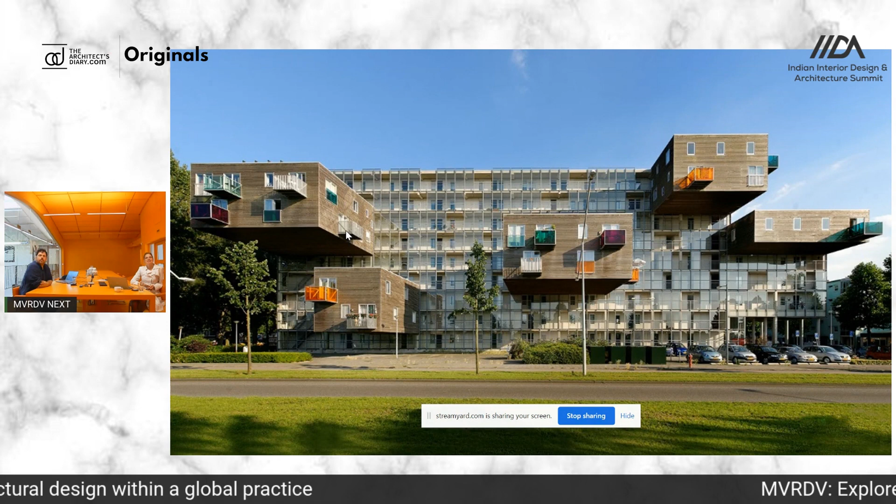Let's look at social first. This is the WoZoCo in Amsterdam, one of the first built projects by MVRDV, and for me personally one of the first projects I fell in love with as an architecture student in the 90s. We were given a site and a brief to fit 100 housing units for the elderly into a very compact plot. The amount of square meters and units we were asked to realize could not fit within this plot, so we questioned the regulations.

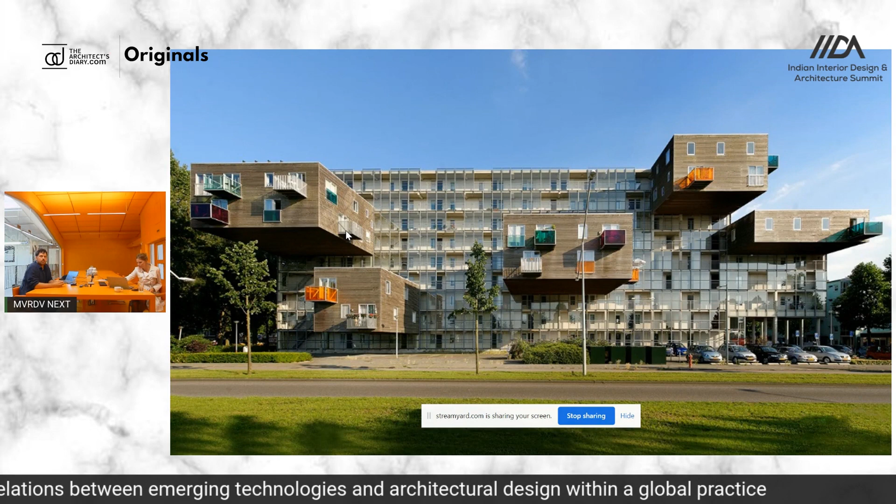At that point, it was possible in Amsterdam to actually exceed outside of the plot boundary. So by adding extra units and cantilevering, floating over the original plot boundary, we were able to realize many more units and give everyone in the block a happy and social place to live in. Even though it's housing for the elderly, if you look at them on their balcony, it's pretty rock and roll. Through this one intervention of extending outside the plot, we made units for everyone more spacious and more pleasant.

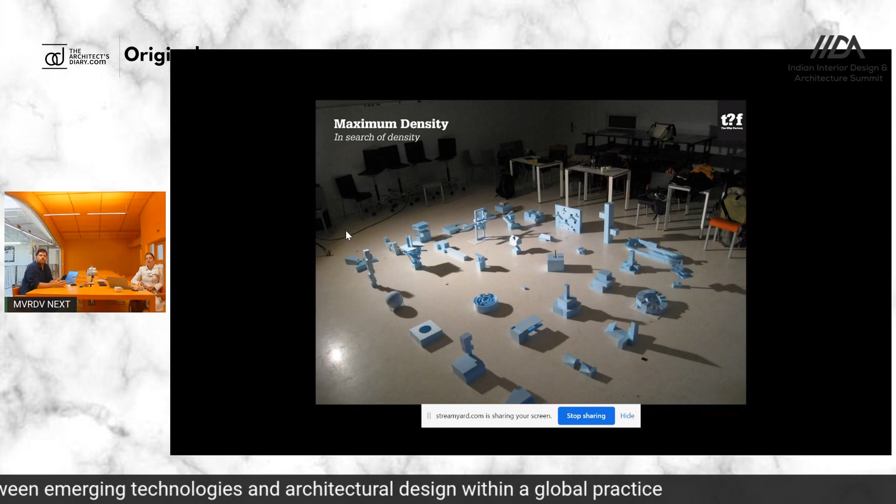Next topic: we create social architecture, but we also create innovative architecture. We just spoke about pleasant spaces and space for people. In Europe, the dream is to have your own house and your own plot, but this is not a sustainable way to densify. If we look at land use and living together in coexistence, in collective individuality and individual collectivity, what would that mean? Can we all live together with our individual hopes, dreams, wishes, and needs in a way that accommodates all of us?

This is a project called the WeGo, done by The Why Factory, a public-private participation between TU Delft and MVRDV. This is an example of what it could look like if we all work and live together in different units, with all of our wishes, dreams, and hopes combined in one slab.

We also create realistic architecture, and with that I'm going to show you the Valley in Amsterdam. This project exists on the border of a central business district and a housing area, and we looked at how to best combine the characteristics of both those neighbors, contexts. What you see here is a combination of the two: a project that on one hand absorbs and embraces the district of the Zuidas, the CBD, and on the other hand is extremely human, porous, accessible, with lots of green and terraces.

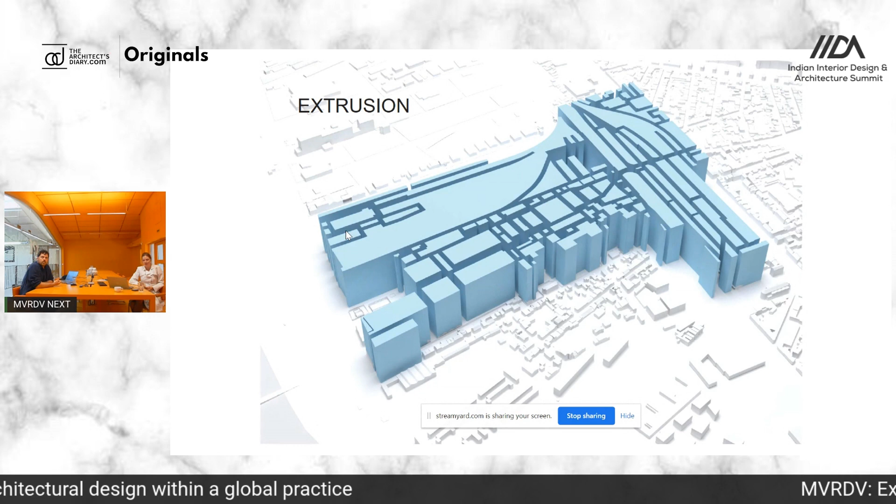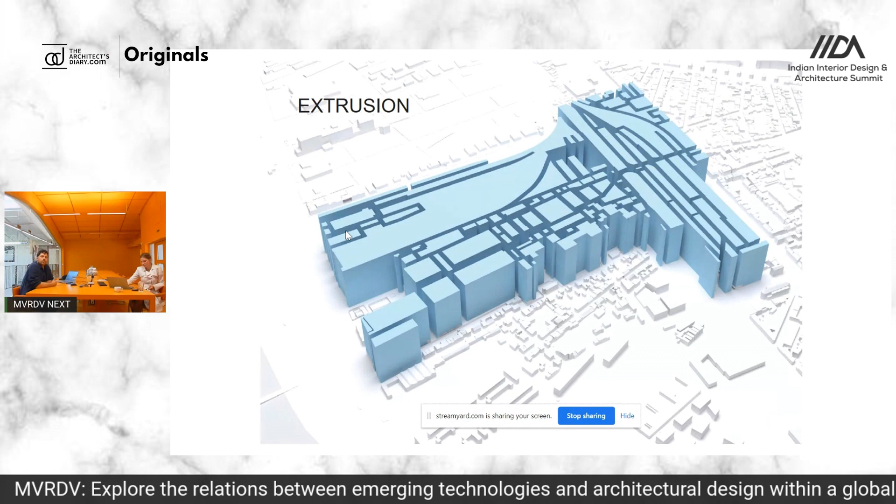This project I'm going to show you now is in Bordeaux. It's a master plan that is actually realized, so if you're in the area you can visit it. Bordeaux is a project based on daylight and sunlight. Here we see the plot we were given in Bordeaux, and what we did is apply the sun and daylight regulations.

If I flip back and forward, you see that we sliced volumes according to regulations, and divided the plots for maximum differentiation. These streets, if you see them now, these shapes are not something you would normally imagine yourself, but this is a project sculpted by the sun, designed by light, as you can see.

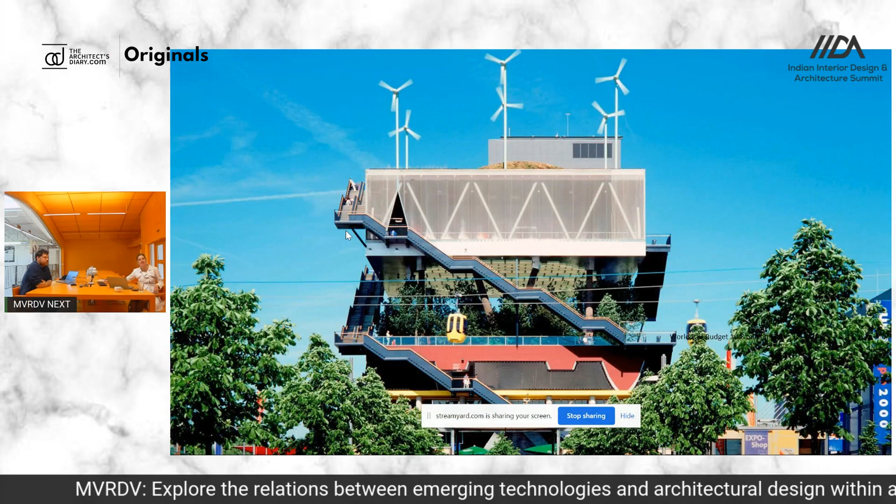The last one is remarkable architecture. For example, the Expo 2000 pavilion in Hanover, which we built as an ode to the Dutch landscapes, a collection of everything the Netherlands has to offer. In addition, since we are a compact country, it's a celebration of triple, quadruple land use, by stacking landscapes on top of each other.

Another example is the Depot Boijmans van Beuningen in the Netherlands, also a dream of hosting, but also exposing a collection of museum art pieces to the public, which is what you see here. This building recently opened, and it is absolutely a mirage. If you see this, you think, is this real or not? And it is actually real, and it exists, and it's wonderful to see.

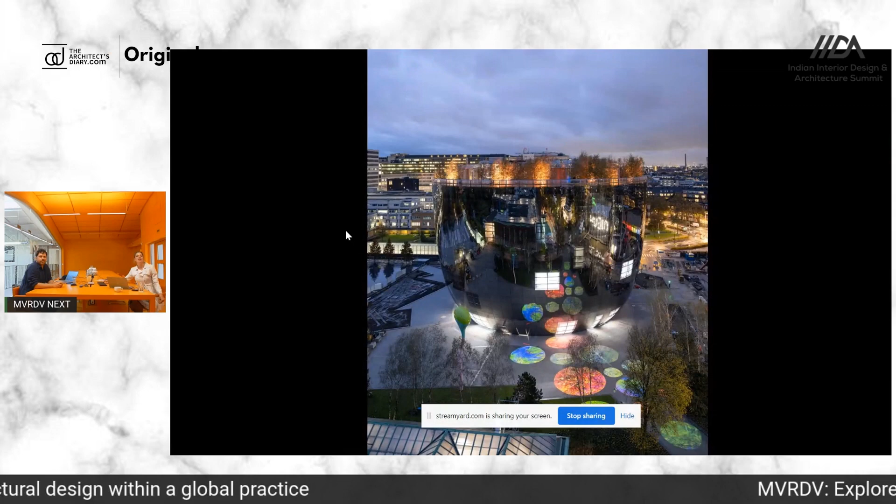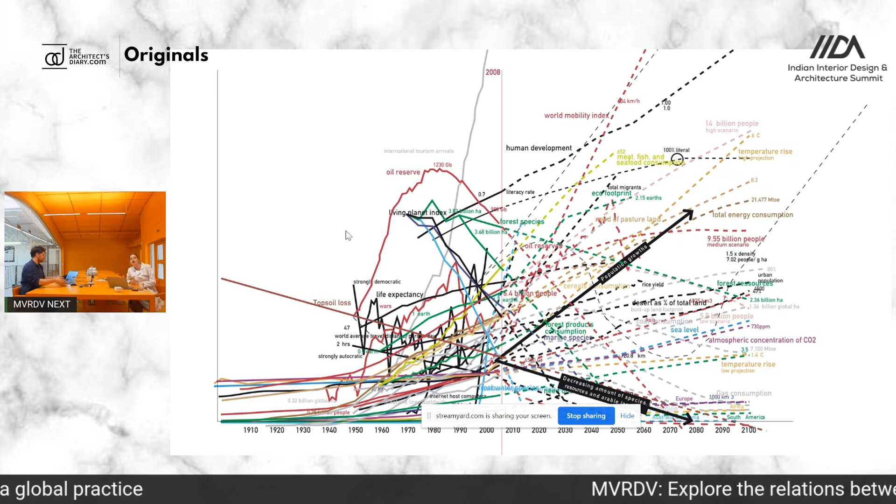Why do we do all of this? Because we are working for a changing world, and there are limits to growth. We've all read the IPCC reports and the Club of Rome, and we know that we are consuming more resources than we have, and we are just growing. Therefore, we also take our responsibility as architects to address, through our work, the urgencies we are facing.

So what's the role of technology in all of this? I'm going to show a quick overview of the history of the meaning of technology within MVRDV's practice, starting from the early 90s until today, and then go in depth into what it means right now in the changing world of 2022. Quick disclaimer, I'll have to pick up the pace a bit here to make it on time, so please bear with me.

If you look at the origins of MVRDV, there's a strong drive for speculation and visionary thinking in the early 2000s, partially maybe due to economic stagnation and a lack of real-world projects, which gave room to think, dream, and be bold. What's particular about MVRDV, and what inspires us to work here today, is that all of these projects were really linked to the making of tools, the making of digital technology.

We see in these projects a link where a vision, in this case for a region in Germany, can only be articulated through the making of software, through the making of technology. It's not that there's a sketch or an idea and then other people develop a tool to make it happen, but the making of the technology is part of the making of the project. We see this done on different scales.

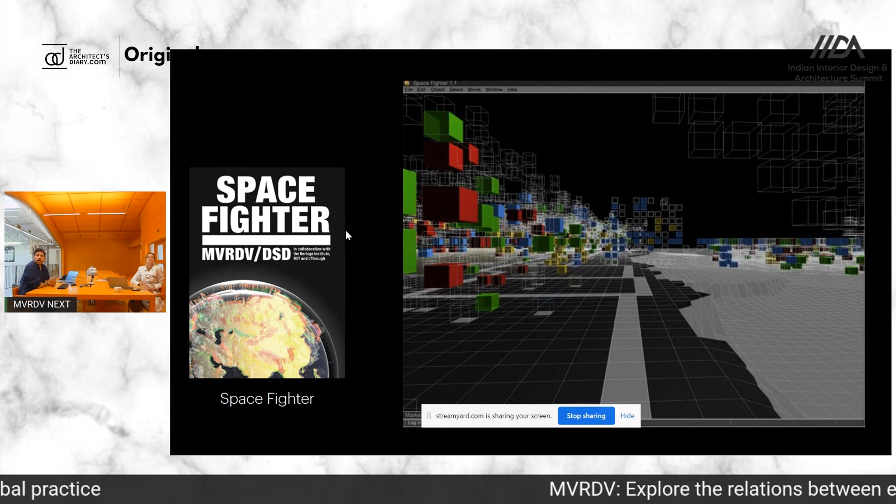The previous one was on the level of a region, so a large territorial scale. The next one, Space Fighter, a project from the early 2000s, was an interactive online multiplayer game where different users would fight, as the name indicates, and maximize their individual space, exploring mechanisms of negotiation, gamification of design, and so on, already back then.

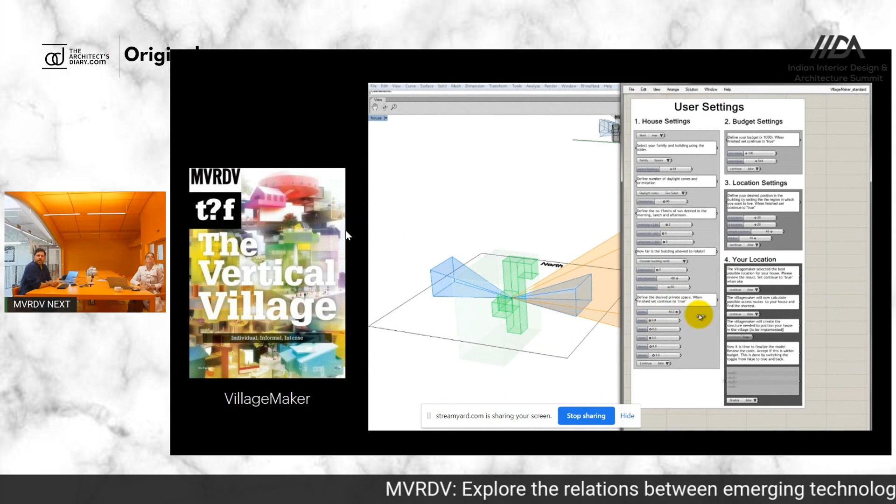A bit later, within the extensive research on the Vertical Village, which in a nutshell looked particularly at an Eastern Asian context on densification of informal typologies, the central element of the project was this thing called the Village Maker.

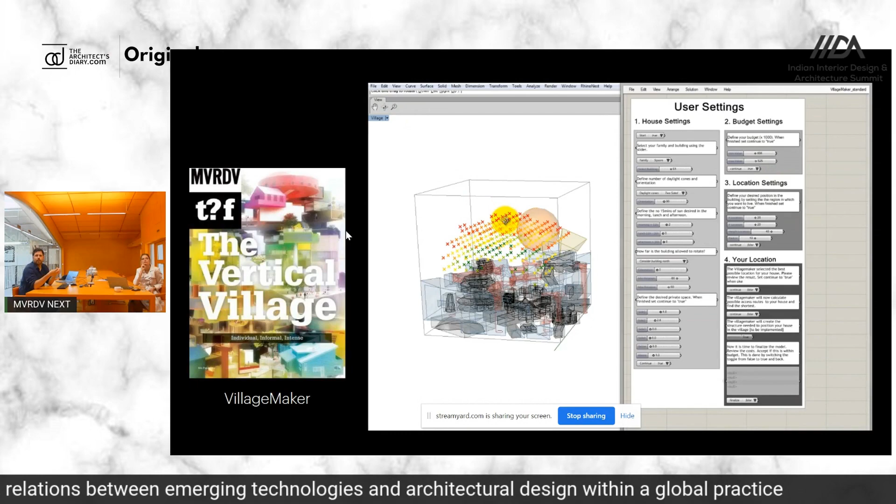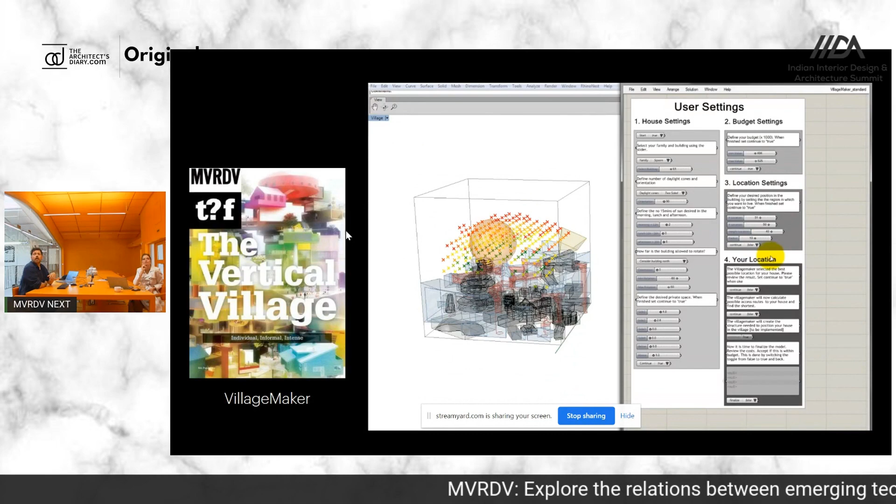It's a software that was developed, as you can see, in Grasshopper, which would allow interactively choosing from a catalog of individual informal single family apartment units and positioning them in this dense envelope. Similar to the WeGo project that Sanne showed in the beginning, you can evaluate in real time your impact in terms of cost, structure, the views that you take from your neighbors, the sunlight that you gain, so costs and benefits.

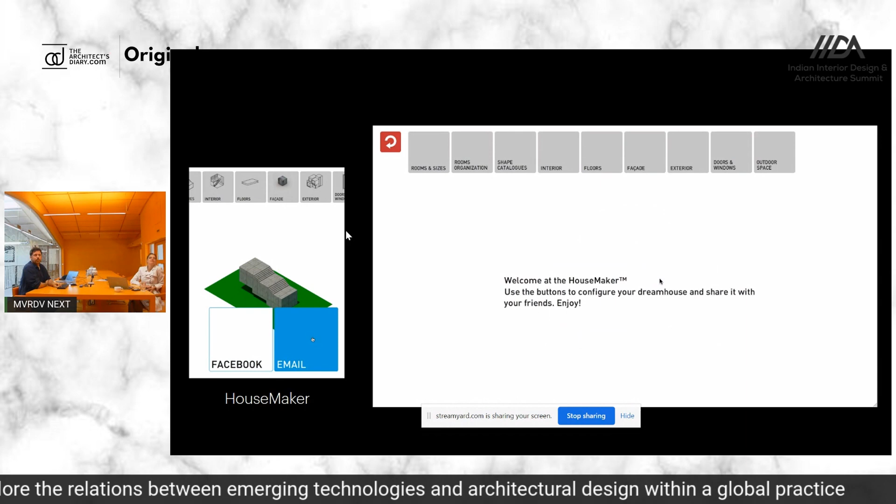And then lastly, one step further—this is probably today quite familiar in anything from online shopping to clothing, fashion, to real estate—the house maker, which would allow basically anyone, not only architects or experts, to design their own houses. So also here an idea of how technology can help make architecture accessible, understandable, and include more people.

So all of these tools from the early 2000s inspire us, but we're not part of them. And of course, as we know, the world is changing. We have to reinvent, re-innovate.

So a couple of years ago, about 5 years ago, Sanne and I started MVRDV Next, which is an acronym for New Experimental Technologies. The interest was precisely to have a unit within MVRDV that is part of the workflows and of the making of projects, but also can take an observant or analytical position on it, and understand the workflows, see where things can be improved.

But then also—that's the new part—break out of that, see what is happening in the world, adopt technologies made outside, bring them in here, and change, reinvent, and challenge the way that we make projects.

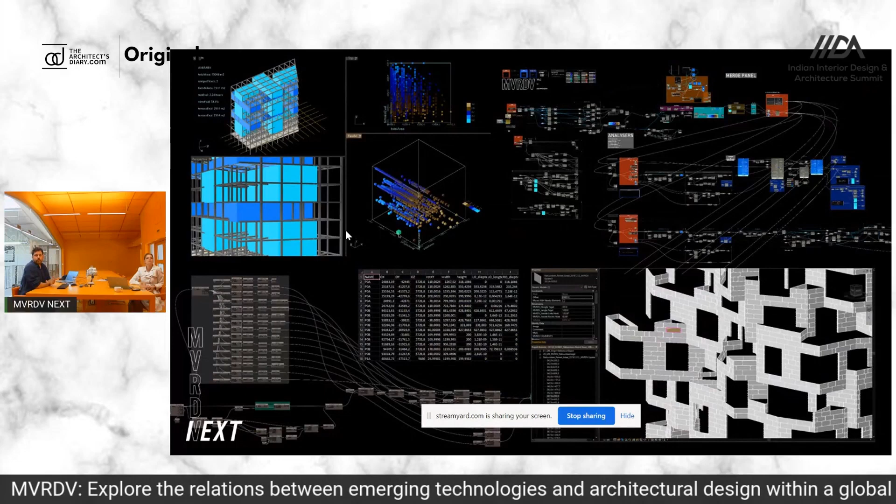So if this is what MVRDV does programmatically, then we like to think of ourselves as the backend, developing the processes that feed into these kinds of projects, that enable them, that nudge them, that optimize them, that maybe in the end might even be invisible in complex geometries, but that actually make them feasible, remarkable, responsible, and so on.

So if we want to look at our role at MVRDV Next, and maybe how we apply technology at MVRDV, we can distinguish it in two directions. On the one hand, applied versus speculative design. The role of technology has this really interesting gap or bridge between things that are useful right now and can immediately prove their value in a very short term, but at the same time you can think further ahead, and it allows you to speculate on maybe the way we'll design in 10, 5, or 15 years. But of course, if you think of how fast things are changing right now, that gets challenging.

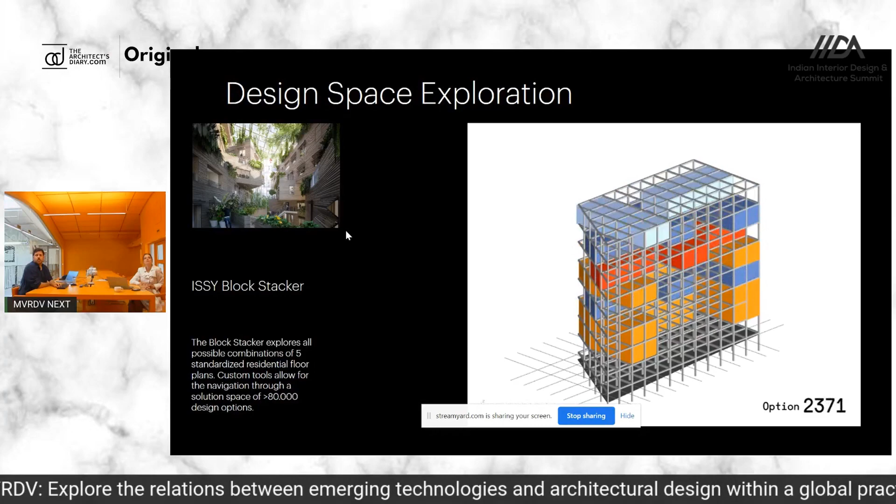So a quick overview of what we do. We do design space exploration. This is an example of a project in France where we had a preset of floor plans that was defined, and the interest was how can we stack them, how can we combine them to create a building that in 3 dimensions creates new qualities, and how can we quantify those qualities?

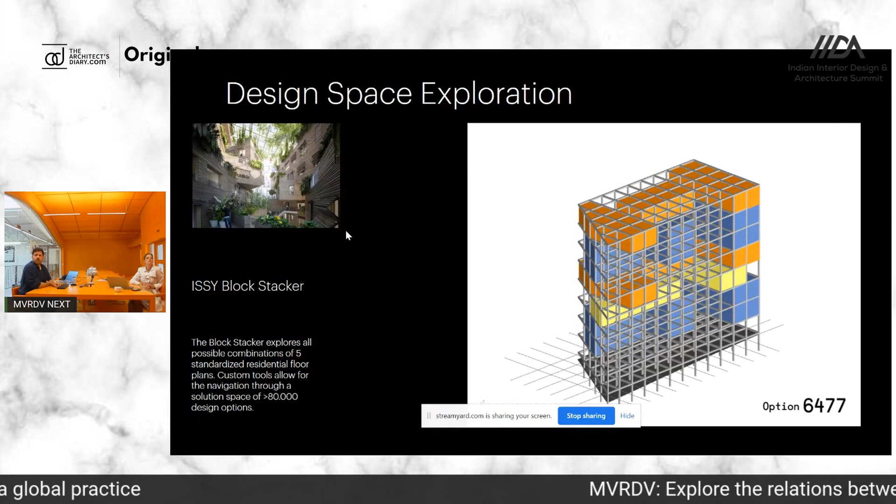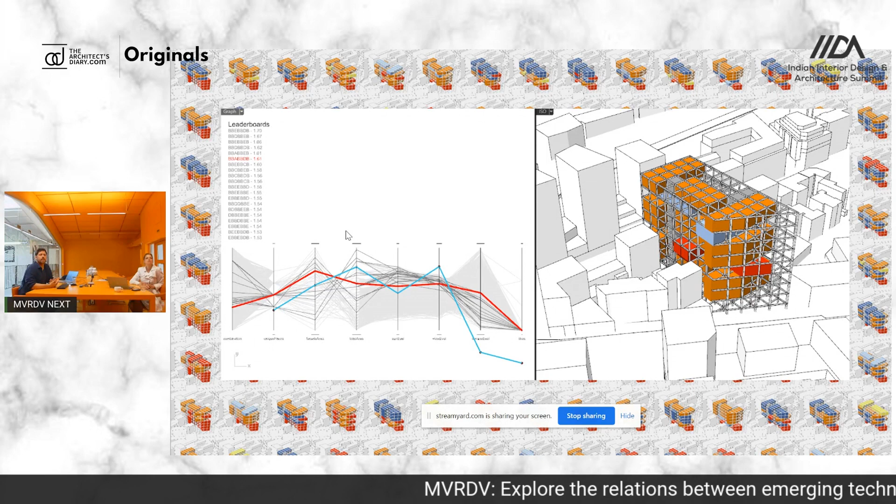In this case, we actually brute forced a combination of 5 floor plans over 9 levels, which ended up with a catalog of about 80,000 possible configurations. We built an Explorer tool that would allow you, as you can see in the graph on the left, to prioritize among different scores or parameters such as views, structural impact, amount of terraces, daylight qualities, and so on. You would draw a graph prioritizing these factors, and the algorithm would give you a top 20 out of these 80,000 solutions that would match closest the profile you defined.

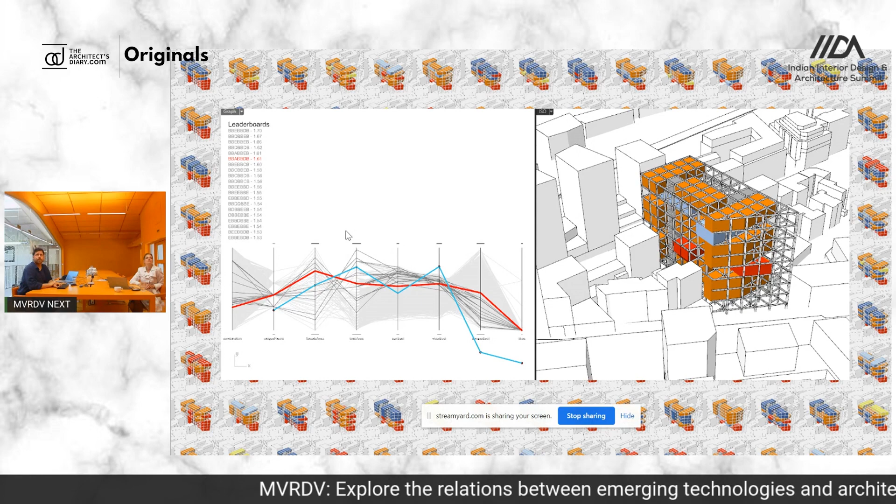We're also interested in the relational datascape—how can we use forms of big data through technology, read it, and use it as a direct design driver?

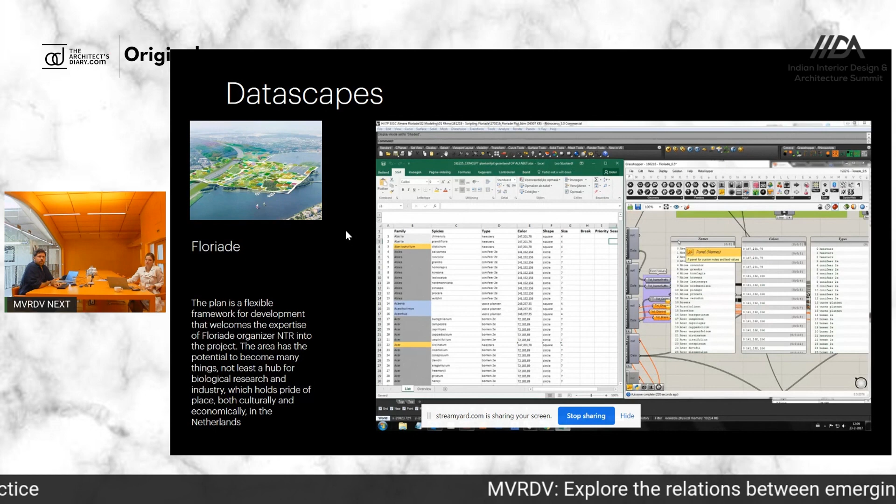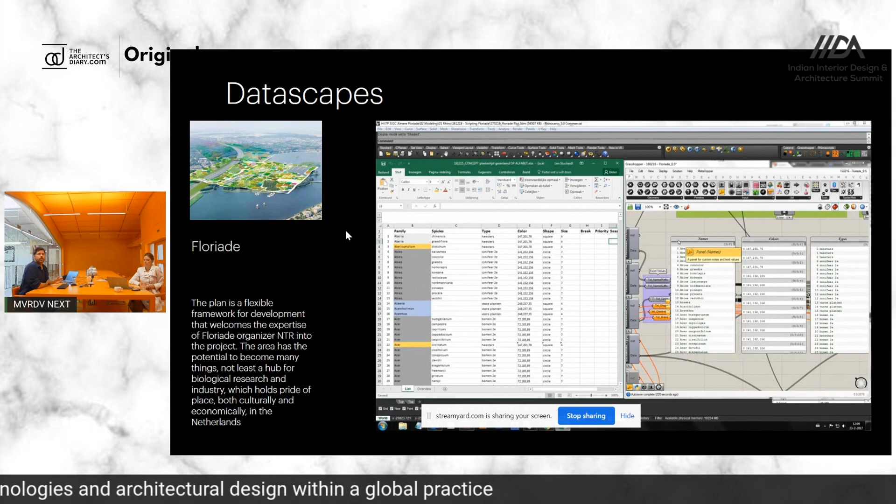In the case of the Floriade that opened a couple of months ago here in Almere in the Netherlands, we were working from the beginning of the project. It was a 10-year planning and design process. We worked with several landscape designers and architects, and as this data set of species of plants for the Floriade was developed - it's a garden show that happens every 10 years in the Netherlands - we would develop a backend or technology that would update the master plan and positions of plants, and evaluate synergies between plants as different collaborators would add information. Similarly, we also built our own datascapes.

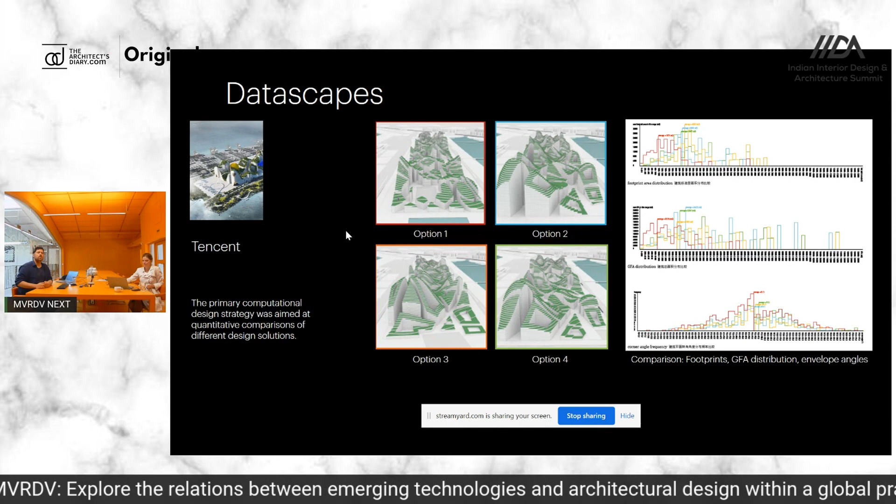This is a master plan that we developed for a competition in Shenzhen, China for Tencent. In the project, the geometries that look rather complex were mainly modeled by hand in Rhino. But as they are so complex, it's hard to evaluate and compare them and choose directions. So we built a datascape essentially of design options, which you can see on the right, with complex comparison graphs for feasibilities of these different options.

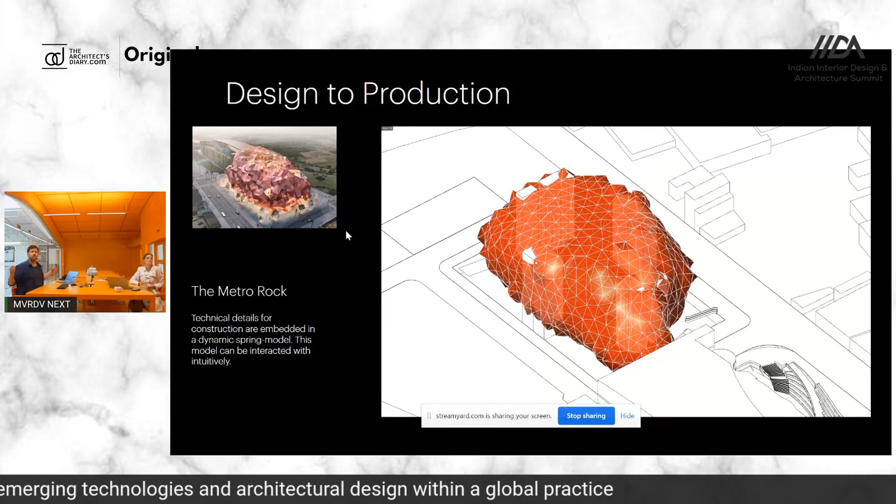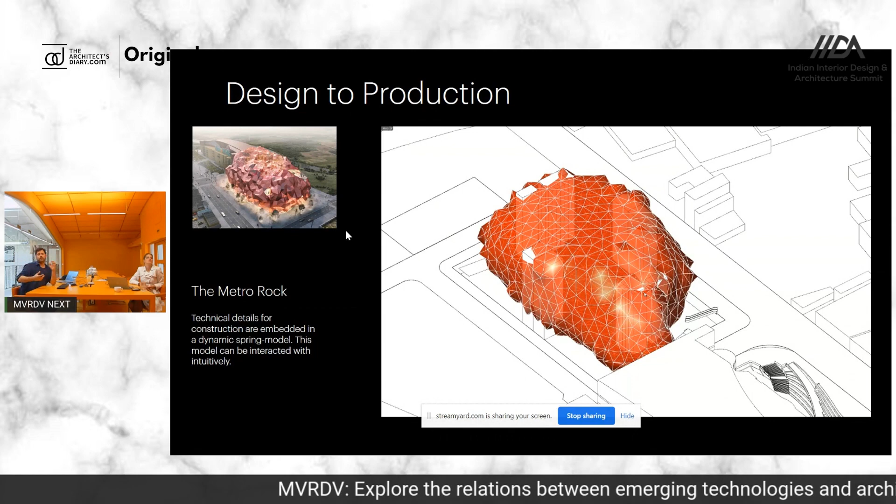Then, of course, another part is design to production - how can we optimize and rationalize complex geometries? What you can see here is a project where we built an engine incorporating both internal requirements for square meters, accessibility, and so on, as well as external factors such as site boundaries and offsets of neighboring buildings. You would have a design that you can nudge and pull and interact with, but it would fight back - basically what fights back is regulations and all these parameters embedded in the technology we made specifically for this project.

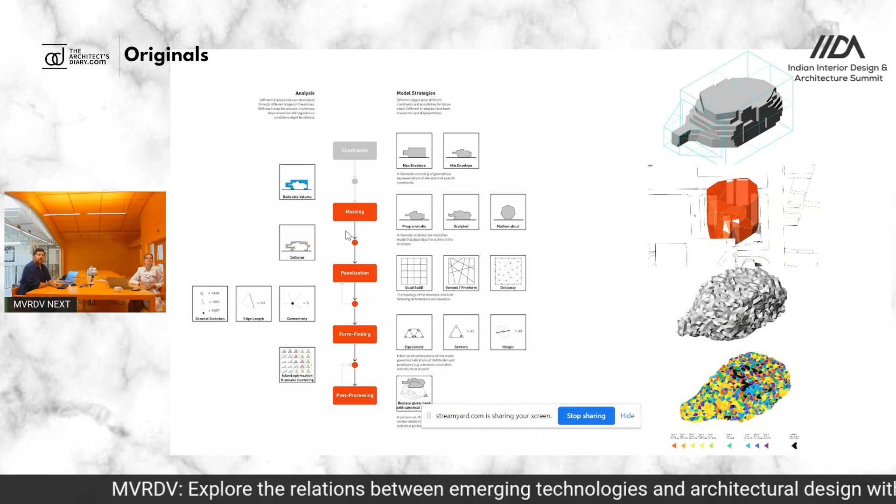This is maybe interesting to show that as technologies get complex, the literacy and the way in which we communicate these technologies is important. So one way we do this is through meta modeling - in a way, drawing diagrams of algorithms, drawing diagrams of workflows and processes in order to communicate them, and also to keep track of the decisions taken in the programs or software.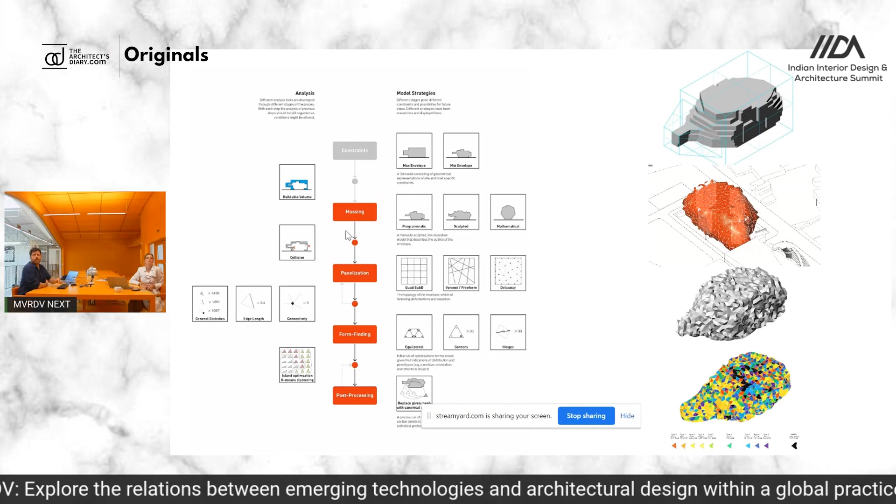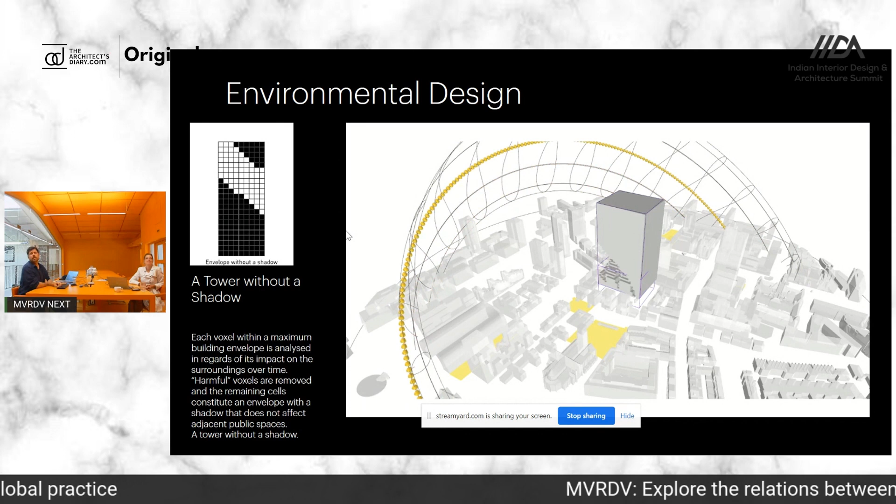Then I guess an obvious one is to develop new methods to work with the environment. Sanne already showed the Bordeaux project where this was actually realized. We also developed our own computational solution, which you can see visualized here. I will go into detail on this elsewhere, so I'll skip it now - and I'll also skip over this.

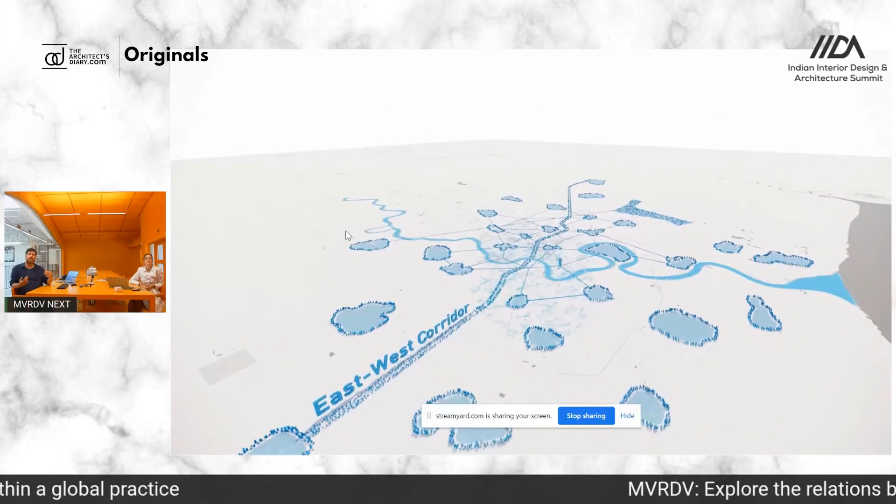A last one, thinking about the metaverse and these kinds of things, is that we can see technology as a way to think about scenarios - not ideas of optimization and rationalization, but just collecting ideas in a digital space and visualizing them easily. We did this in Bangkok, a projection of futures and scenarios, generating a collection of ideas and visions superimposed within a large model of the city. It allows us to talk about things specifically for locations - an intersection, a crossing - but also to zoom out and see multiple perspectives on the complexity of different actions, interactions, and interventions. I think that's something that could link to the metaverse.

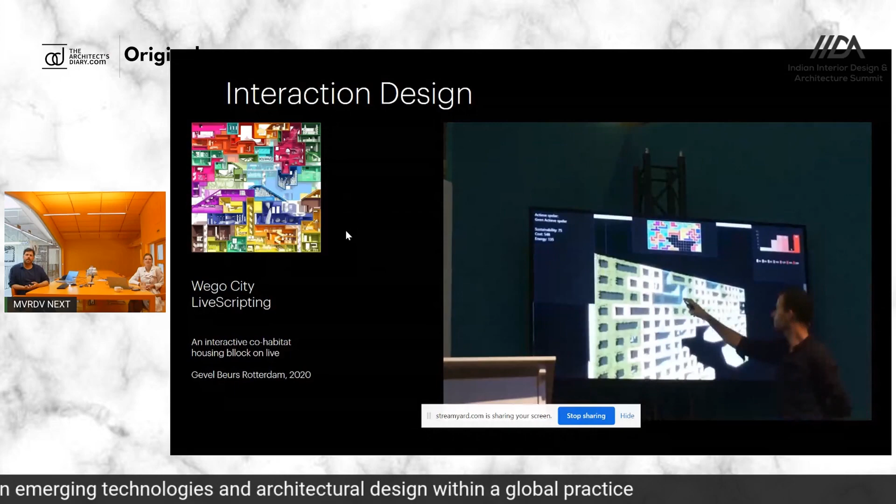The next one is this dream of real-time design. What you can see here is a lecture from one of our associate directors, who at the facade fair talks about complexities and compositions of different facades and materials. The event evolved into a participatory process of discussing together with the audience and, in a way, designing the project. In the back end, one of our colleagues was adjusting the code in real time, changing materials and facade compositions. It was essentially a software built for real-time design - we call it live scripting.

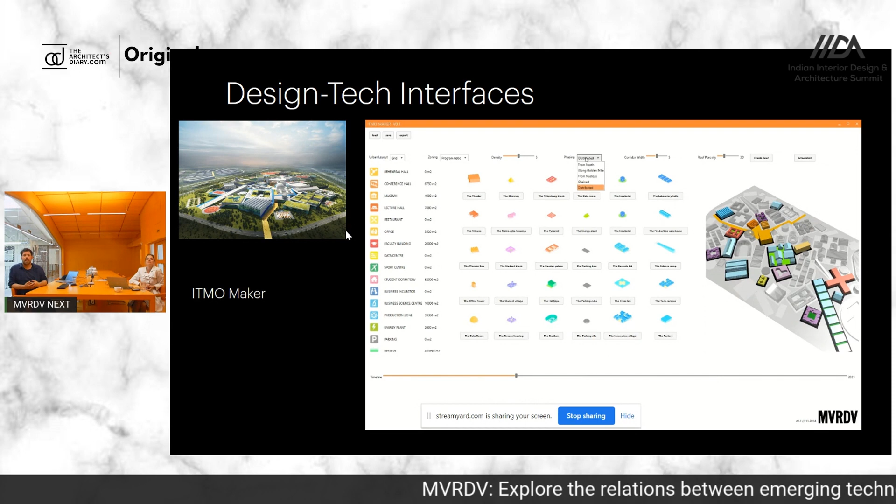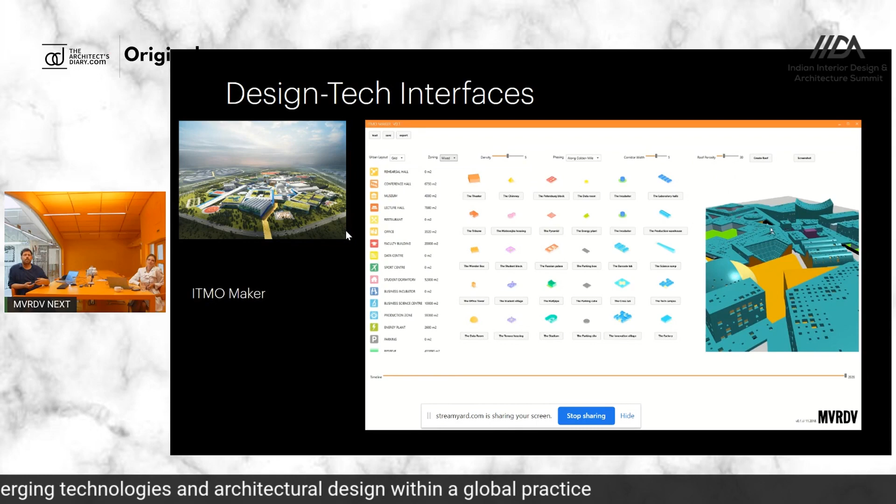Another interest with any form of live or interactive design is the making of interfaces. As a user, how do you visually communicate through software the costs, benefits, and impact that design decisions take? I think technology has a really interesting role here, because it can help make these complex processes of urban design understandable and more approachable to a general and larger audience. So, a quick first deep dive into the Valley.

How did we turn this from a bold design and beautiful renderings into a realistic project, as one of our statements? There are two parts to it where technology played a decisive role. The first one is in the optimization of the massing.

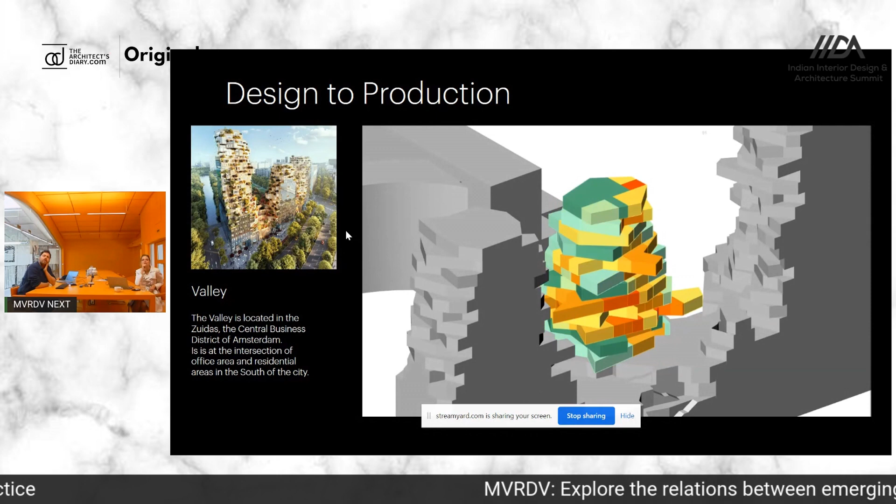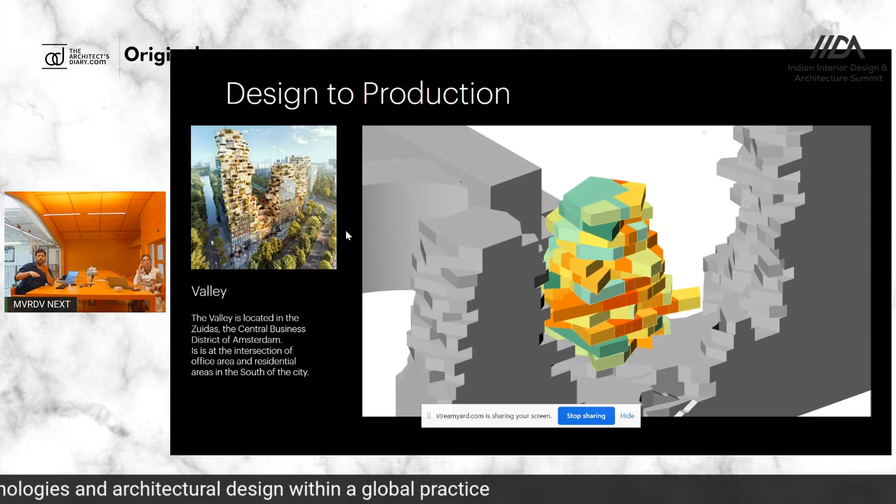This was in collaboration with Arup, Arup's computational design unit. It was essentially an algorithm that would explore different angles and combinations of massing and evaluate them both according to standardized modules for facade length, as well as the impact of shading in the summer and heat gain or solar exposure in the winter. It's quite interesting because in the end, what this algorithm exploits is the difference of the solar arc between winter, where you want a lot of sun to heat the building, and summer, where you want as little as possible.

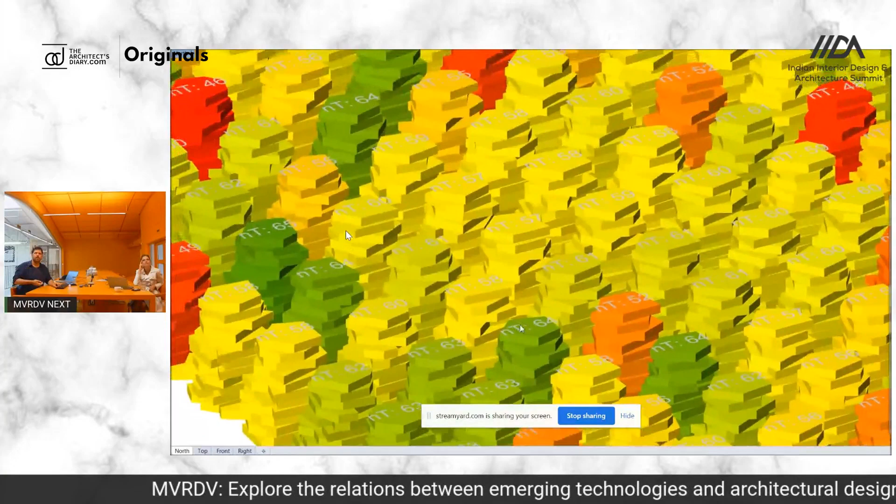Again, here you use technology, algorithms for generative design, and you're immediately confronted with this infinite array of design possibilities. Here we see again that scoring is a key element to do this—in green, options that perform better, and in red, obviously, options that perform less good.

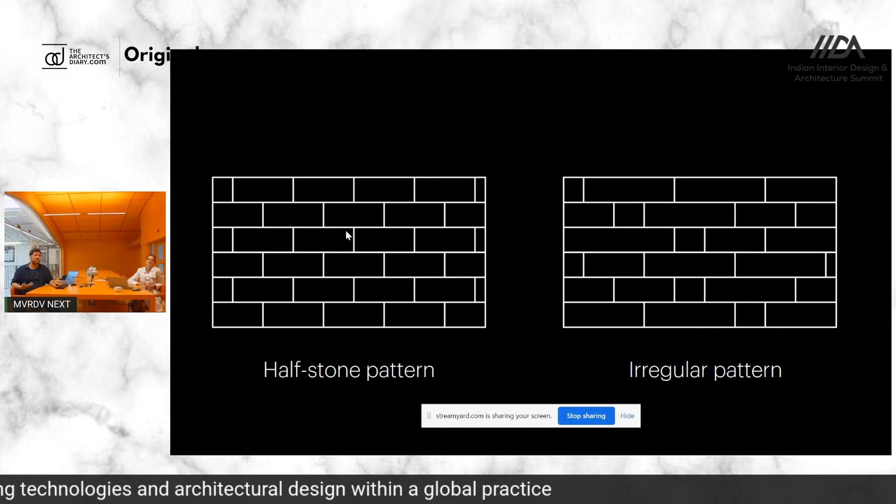The second part here, and I think that is something that might look unspectacular at first, but actually when you visit the building, is for me probably the most essential part of it: the facade. This is one of our first long-lasting projects that we developed with MVRDV Next, all the way from the concept and design of the facade to delivering construction documents.

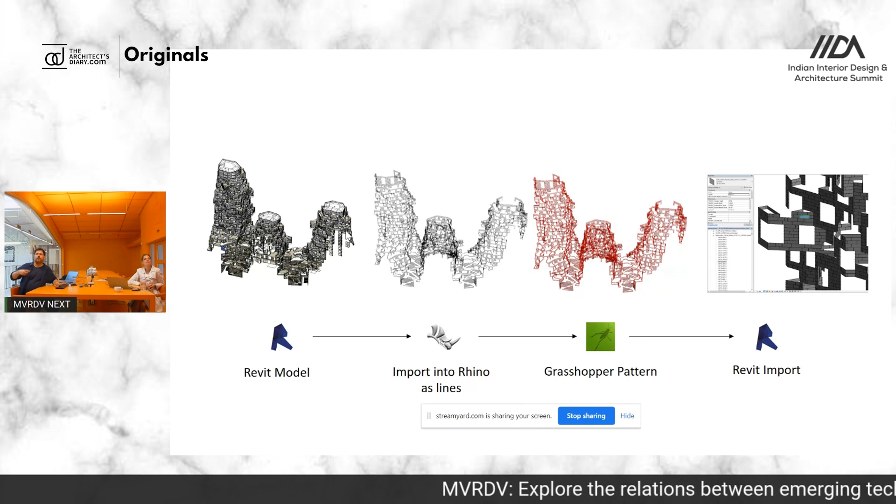We developed a workflow from the Revit model—at that time the project was already in Revit—to a more flexible design in Rhino and Grasshopper, and then communicating or sending that data back into the format of the facade engineers and cost calculators. Again, here, the question of intuition of the designer was very interesting for us.

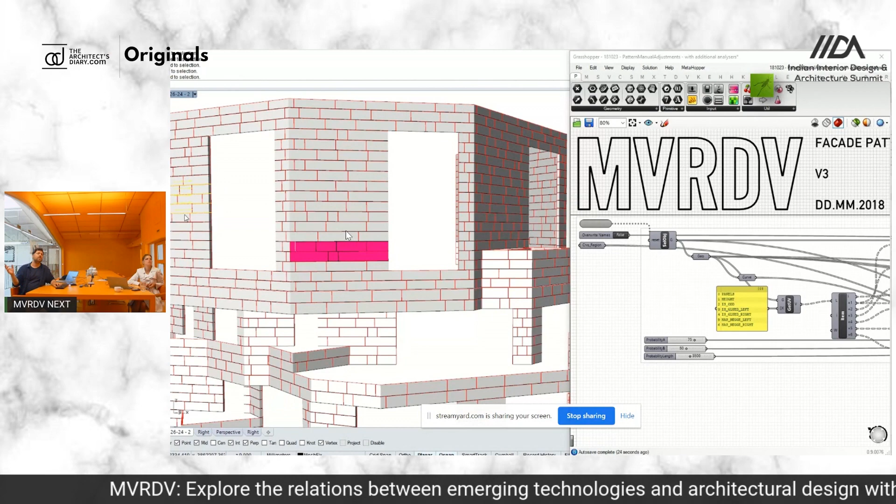As you can see, we developed an engine that would propose design facade pattern alignments. There are several rules embedded here, from the modularity of facade tile length to specific rules for edge conditions and so on. As a designer, once the algorithm proposes a solution, you can just select curves or elements within this, and it will keep on iterating different combinations. As soon as you're satisfied with the composition, you just deselect it, and it will store that result.

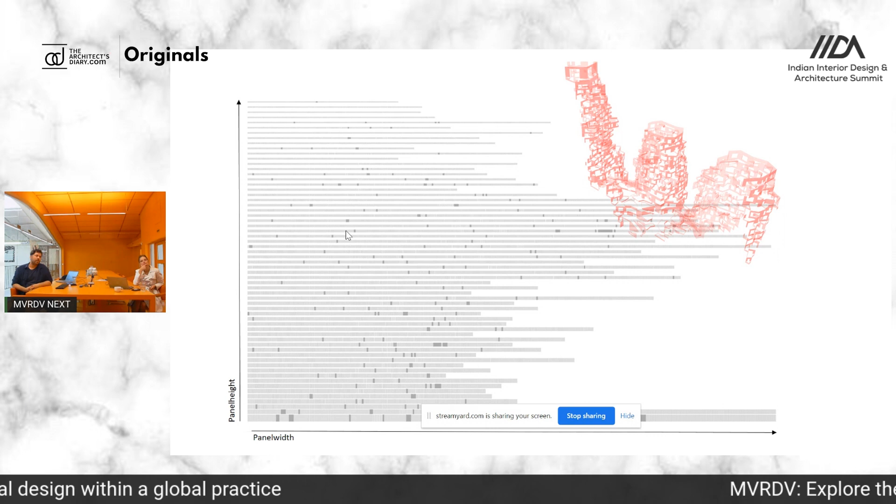Then, of course, there's the other part to this: from intuitive design to just monitoring of impact. Here we can keep an overview and track the distribution of tiles, the quantities of different length and height. That helps to keep costs under control, communicate with clients, and show a general awareness or understanding and control of the process.

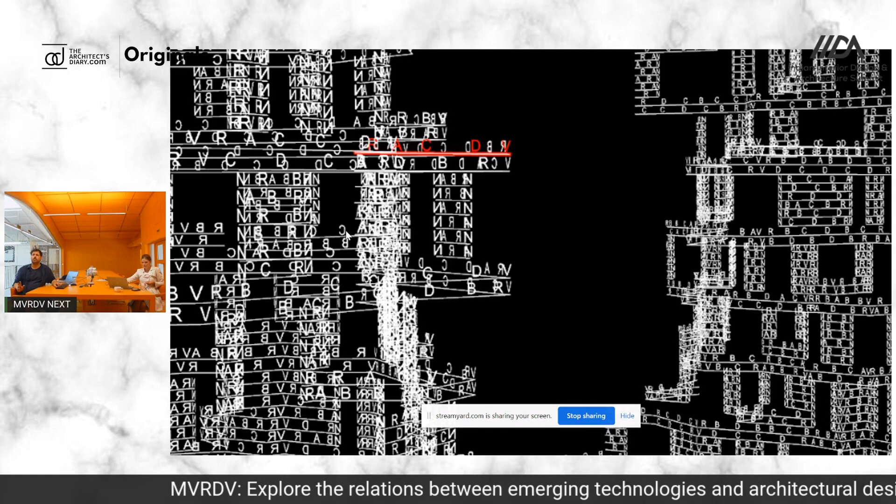Again, questions of visualization of these processes fascinate us. In the end, the project only had 4 different tiles plus exceptions—A, B, C, D, plus 2 exception tiles. We developed this methodology to project those codes onto the 3D model, and again you see the project as a form of a datascape.

So the built project we already showed. I think at MVRDV we can be proud of a project with pristine detailing, and this one, I think, achieved that. I really think that the technology here, the digital process of how this was developed, is key to the success of the building.

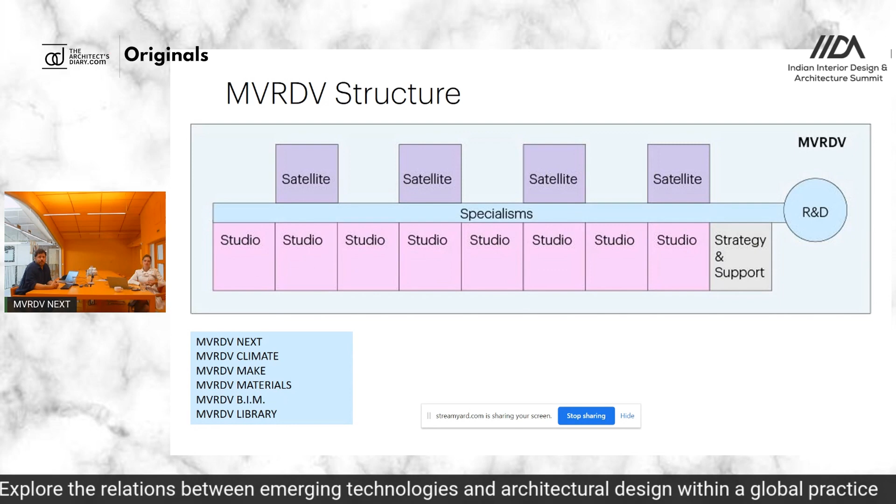We pick up on challenges, opportunities, ideas and innovations that happen in design projects in the studios. We sense that, we talk with them, we help develop these things, and then accelerate them into our standalone independent research and development projects. We publish these things, so that's key to communication, not only internally but also externally.

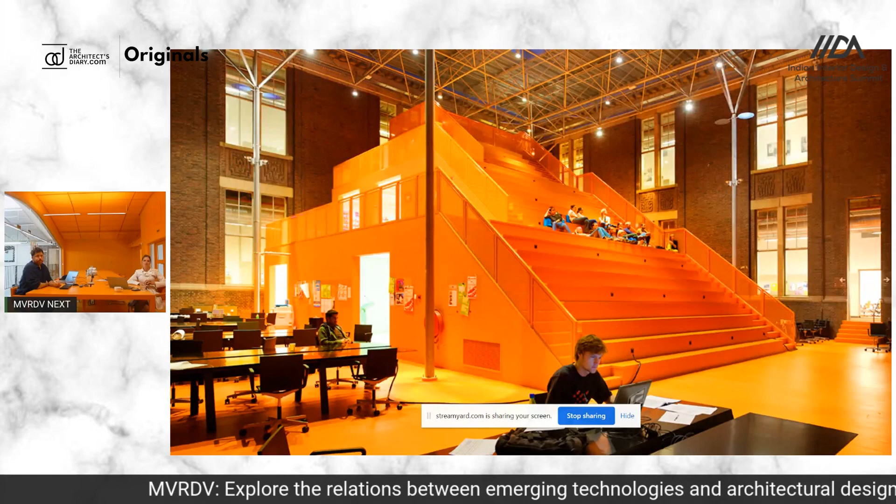We also collaborate with universities worldwide. This is the think tank, the Why Factory, that Sanne mentioned in the beginning. They also publish a lot on visionary cities. We won't go into detail on that right now. I see I have 1 minute to explain a full project, so let's try to keep the pace.

I wanted to show one project that, in our opinion, is innovative. This is a standalone project developed as research by us, by MVRDV Next, called Solarscape. As you can see, this is the format we developed: we make research and publish it internally to the office in the form of research reports. Solarscape is one of those.

Solarscape began with the observation that, at least in Europe and the Netherlands in particular, public building policies are changing, from something easy to understand, from restrictions. For instance, take a building envelope, a new plot, a new development: the maximum building height will be defined by landmarks. Don't exceed the landmarks of the city. Easy to measure—draw an elevation, measure the height of your building, done.

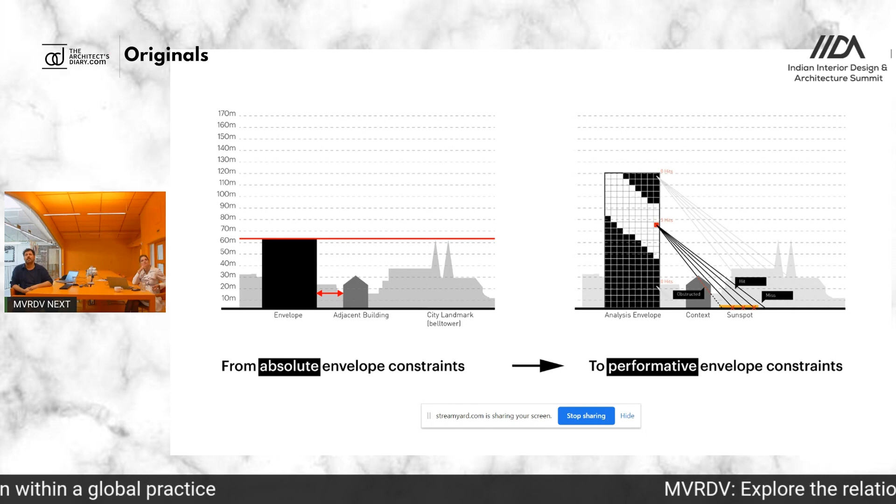Nowadays the regulations are changing, and I'll show an example in a moment, to what we call performative constraints. That means you can build higher than the landmarks, but you can't impact your environment negatively—for instance, through creating shadows or shading on your surroundings, on public spots defined here as sunspots—and that becomes a lot harder to measure.

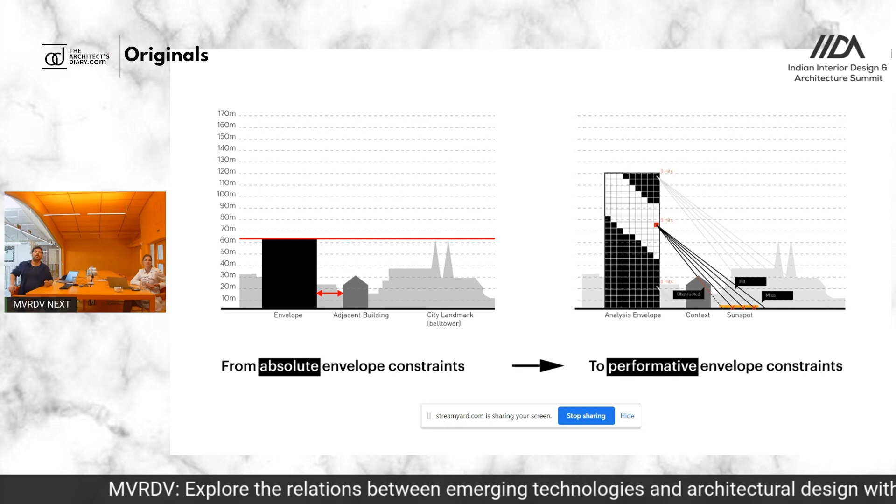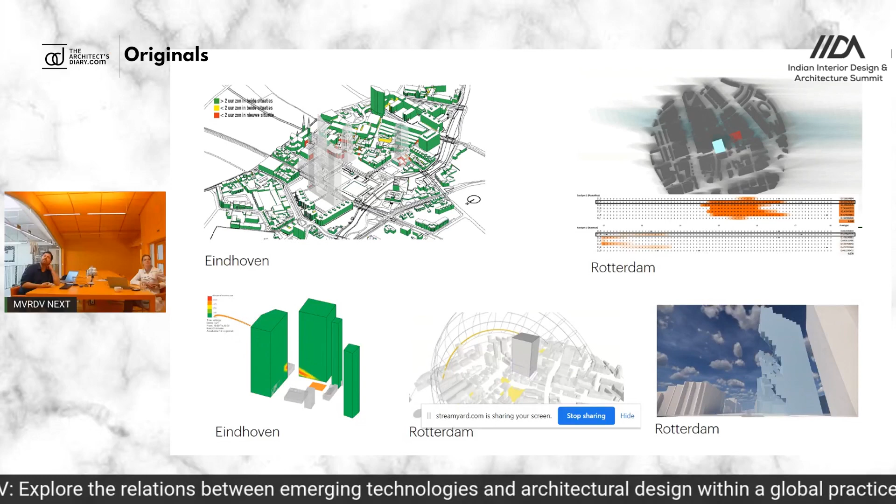So how do you know if a building impacts, or how do you know what kind of buildings are possible without impacting your surroundings? We actually found out about this because clients asked us. Clients came to us for feasibility studies and said, there's this site, I don't know how much I can build here. Is this interesting? What can we do? Because there are these rules about sunspots, but we don't know what that actually means. Like, can I build 200 meters? Can I build 100 meters? How can we grasp these complex geometries?

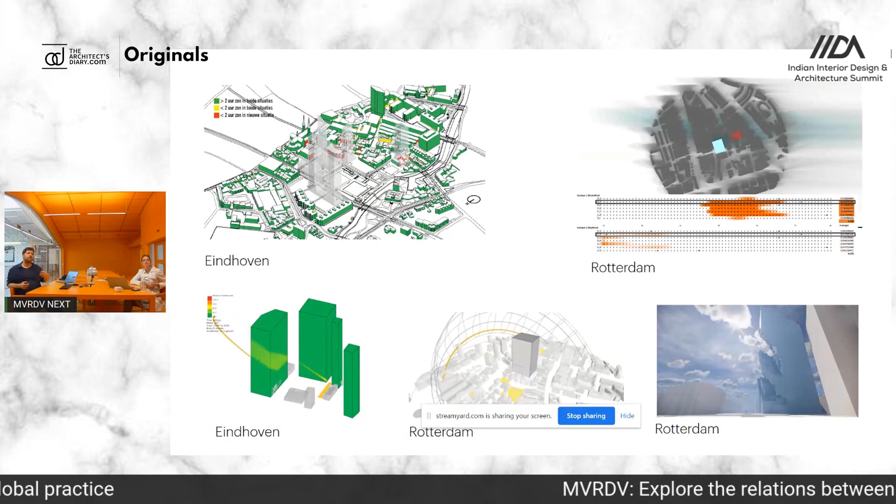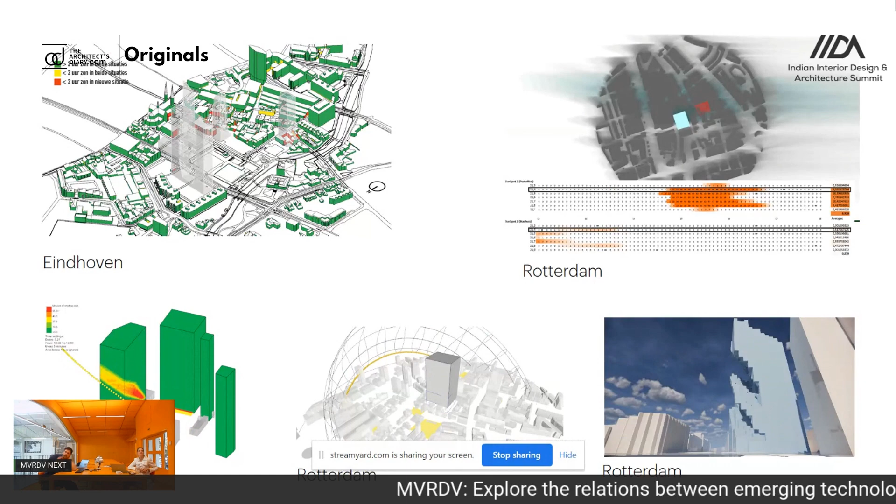Out of that—all of these 5 projects are a selection of projects that happened before our research, in design studios in the office that we collaborated with. By developing technological solutions within these projects, we invented, if I may use the term, a process in the end of voxelization. I guess the model on the bottom right shows it the most clearly, where we rasterize the building envelope into small discrete elements, voxels, and then evaluate the impact for each one of these voxels on the surrounding. It basically becomes an exercise of removing the voxels that don't perform or that impact your surrounding in a negative way. This is very exciting to us because, first of all, we love pixels and voxels as a design element, but also in this case, it's very transferable.

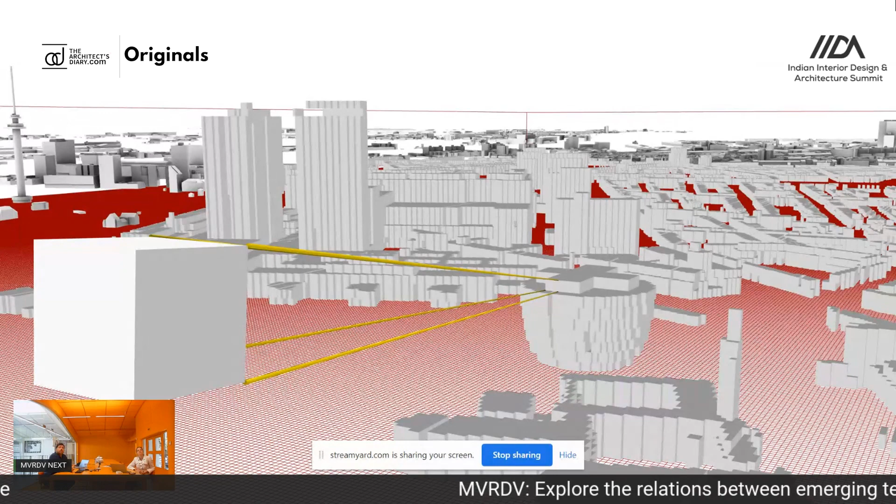In Solarscape, we explore the potential of this method for daylight, for sunlight, but you could imagine attaching any other attributes to this, and it essentially becomes a 3-dimensional map of the city where you don't index streets and buildings, but just space, and each little element of space has attributes. It might sound a bit abstract, but we'll go through it right now and how that worked in the project of Solarscape.

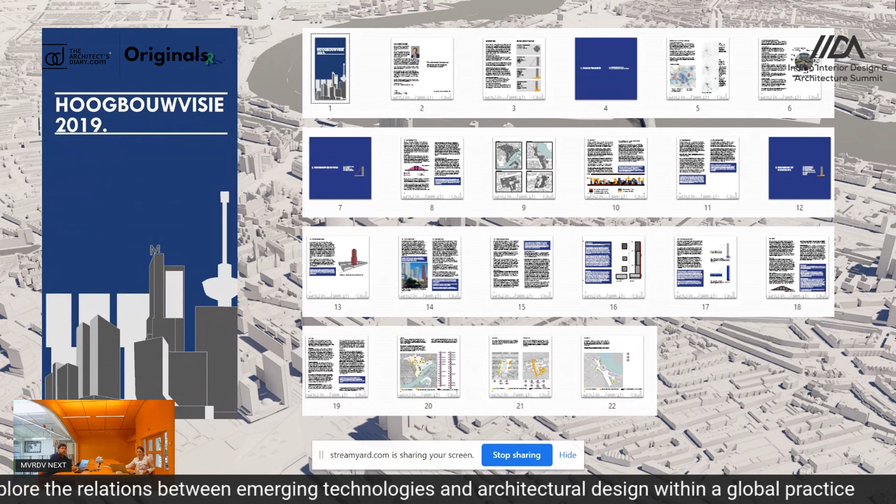What you can see here is the high-rise vision of the city of Rotterdam. This is a public urban planning document which defines high-rise zones—areas in the city where you can build as high as you want. Rotterdam is in urgent need of housing; there's a form of housing crisis or shortage forming. In response to that, we need to densify. There are 4 areas in the city that were demarked. This is the one in the center of the city, where we are also sitting right now.

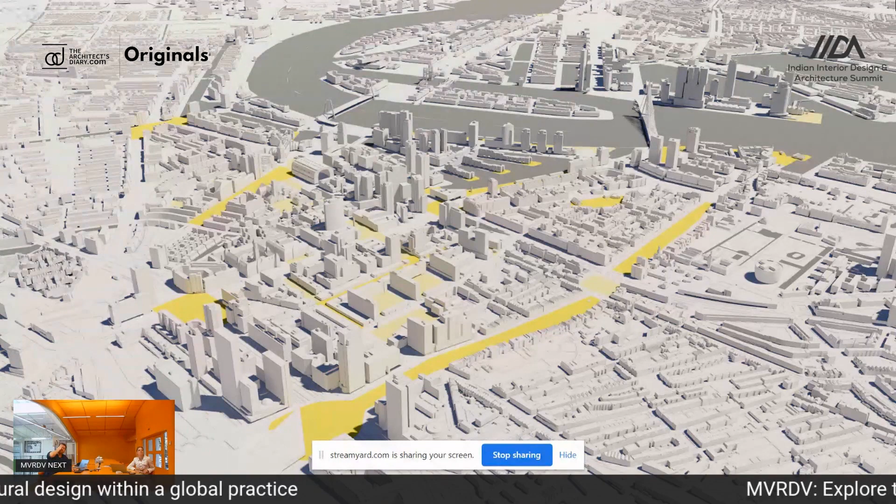Within the zone, the municipality defines sunspots—public spaces with some particular importance, central elements, either for mobility or as recreational locations—and those are protected in a way. So whatever you build, you can build high, but you cannot impact the daylight on these public spaces, so you cannot add shadow to them. And then, how to build buildings that don't cast shadow?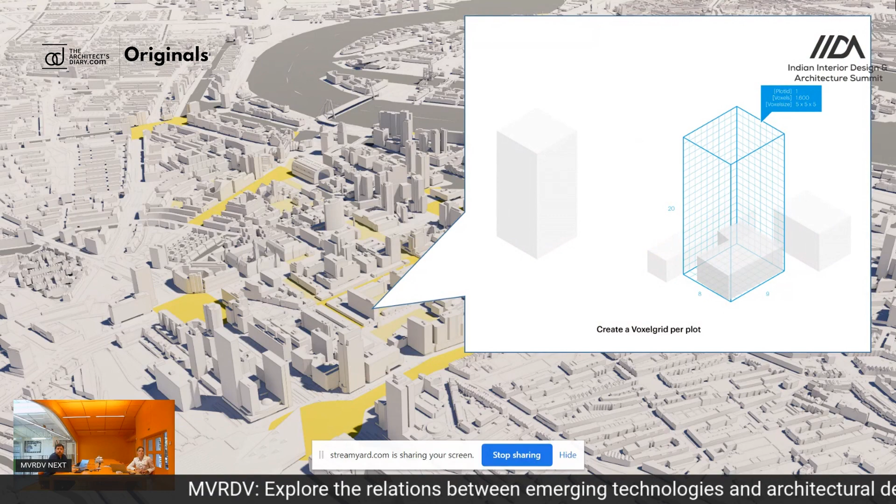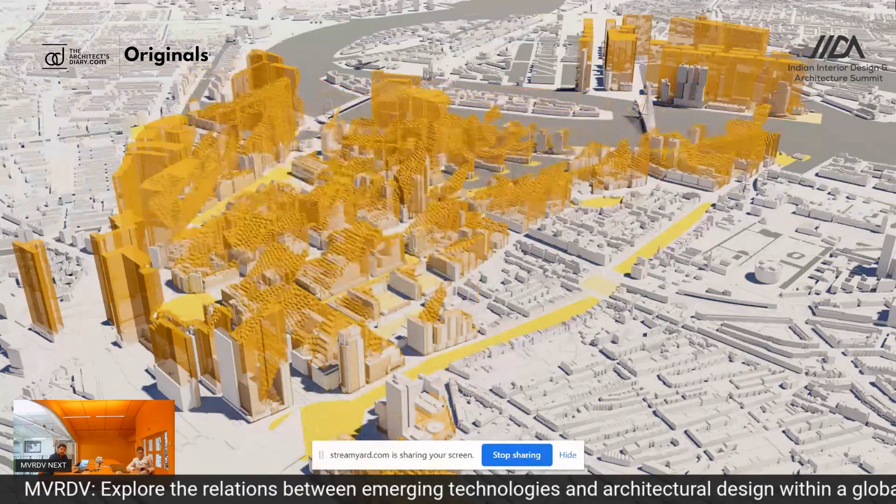What we do is we take each of the plots within the area that can be developed and we maximize that envelope. In the study, we went up to 200 meters, we rasterize them, and then we evaluate each of the voxels on whether it casts shadow on the sunspot or not. What you get at the end of this exercise is a model, a subtracted model of these voxel envelopes.

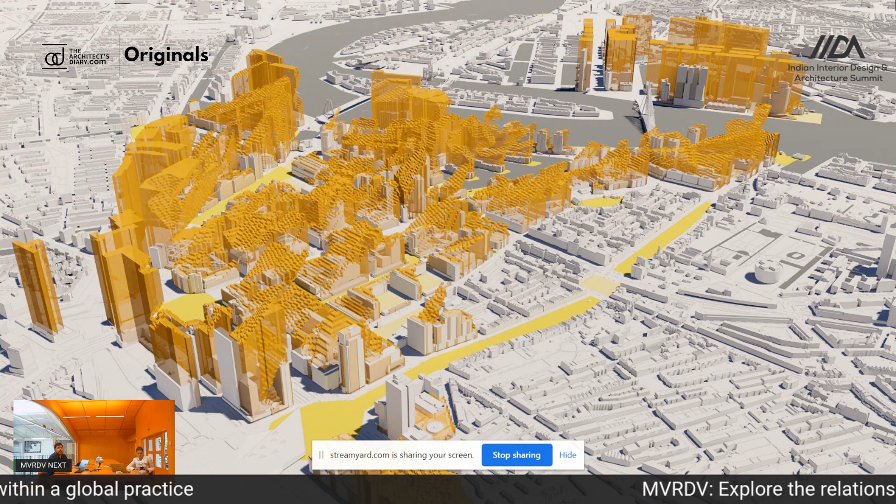What we can see now here is the development potential of the city—this is the amount of square meters that could be added. These are not buildings, these are envelopes in which you can design buildings, but it shows the space of possibility for the densification without impacting surroundings.

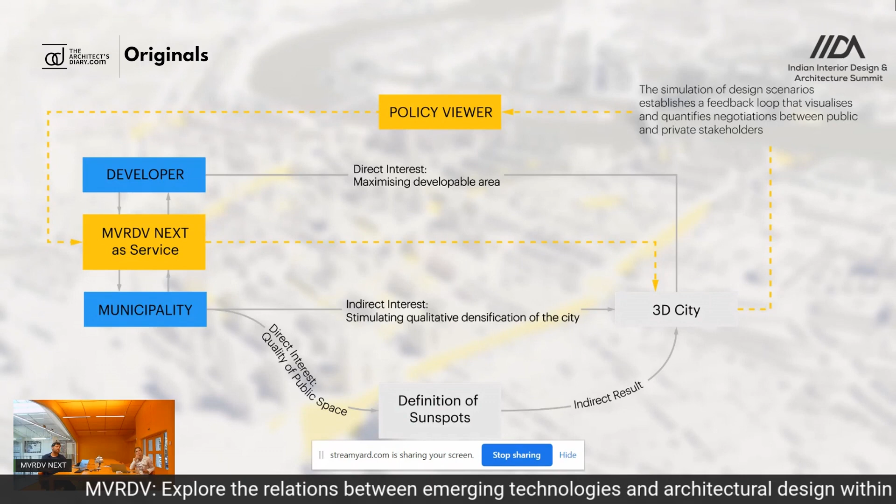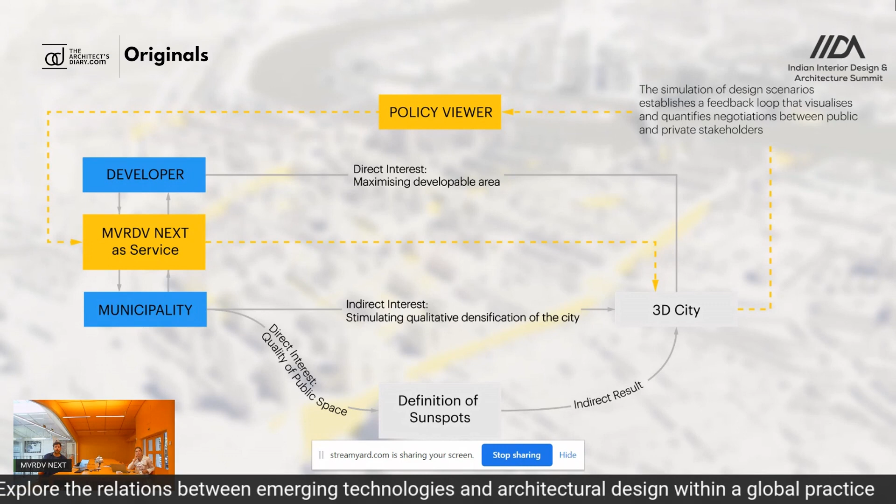We spoke about this with developers as well as with the municipality. I think both sides were very excited about it because it allows you to translate a legal document that is articulated in words, maybe in diagrams, and to spatialize that and make it tangible and understandable. I think that's also the role we see of technology here—as a way to communicate and establish feedback loops before the making of policies at municipalities, and then also to impact or give a voice and show true scenarios of how designers and developers, with formal or aesthetic interests and commercial interests, can utilize these policies.

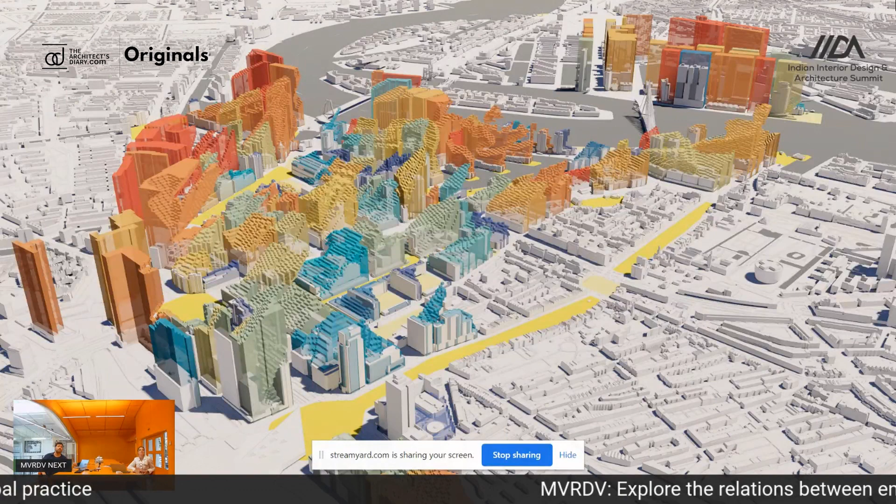So this is another way to quantify it or to visualize it—just how many square meters can be added. So the volume of the existing building proportional to the space that can be added to it.

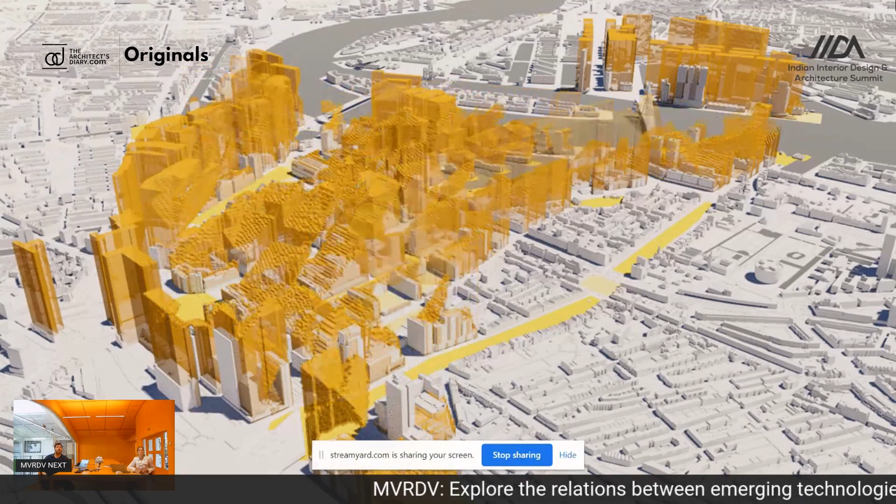And I guess this is a form of a collage where we want to show and explore that there's a potential through technology here that building policy itself doesn't have to be strict, that it is a process of negotiation. So in a way, all of these cities that you see flickering on the screen right now are possible if you enable the communication between developer, architects, designers, urbanists, artists, people, and the city, the municipality of Rotterdam.

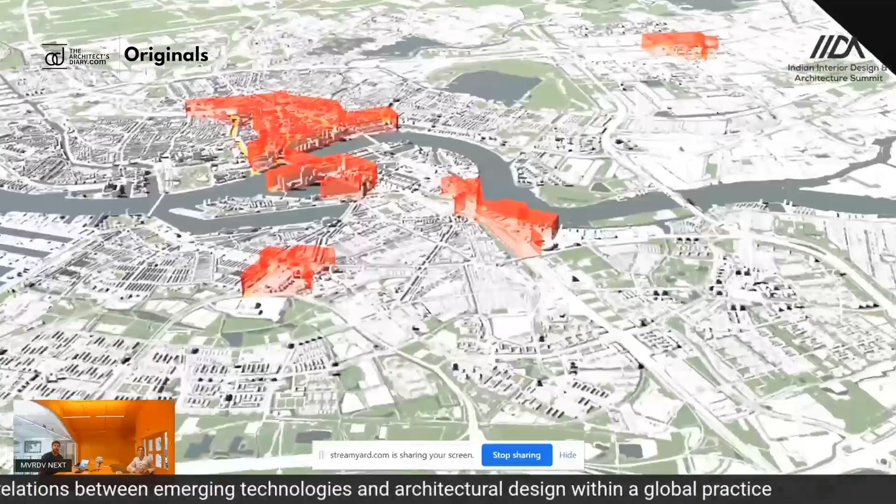There's a short video, I think we will end it with that, which essentially shows the process of making Solarscape. You see a fly-through of Rotterdam. So that's, of course, also essential for digital technologies here, that there's a strong data awareness. This is a model that's publicly accessible, hosted, developed and maintained by the municipality. So it's easy, or it helps a lot, to build technologies on these kinds of digital twins of the city. Data awareness is key here.

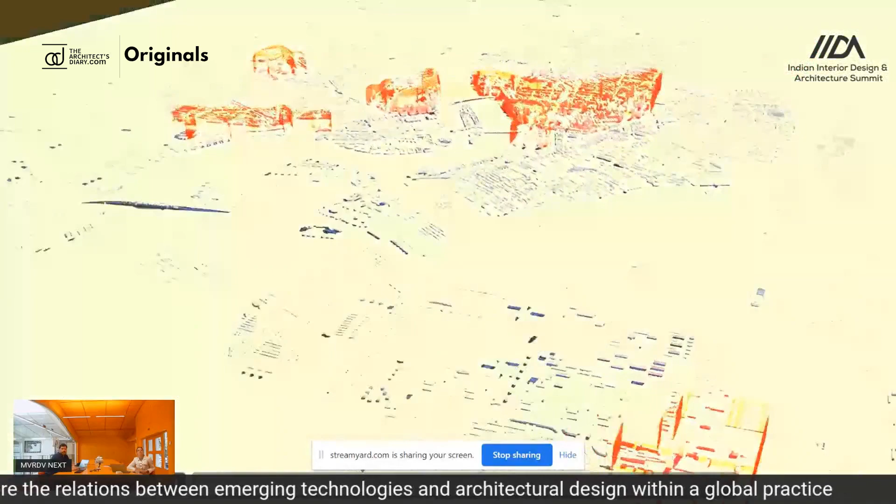And as we fly through, in the second step, I'll skip a bit, we see the algorithm. This is the calculation for each of the envelopes, generating the voxels that are possible, quantifying for each of them. I think in the end we had 120 million calculations for this model to be done.

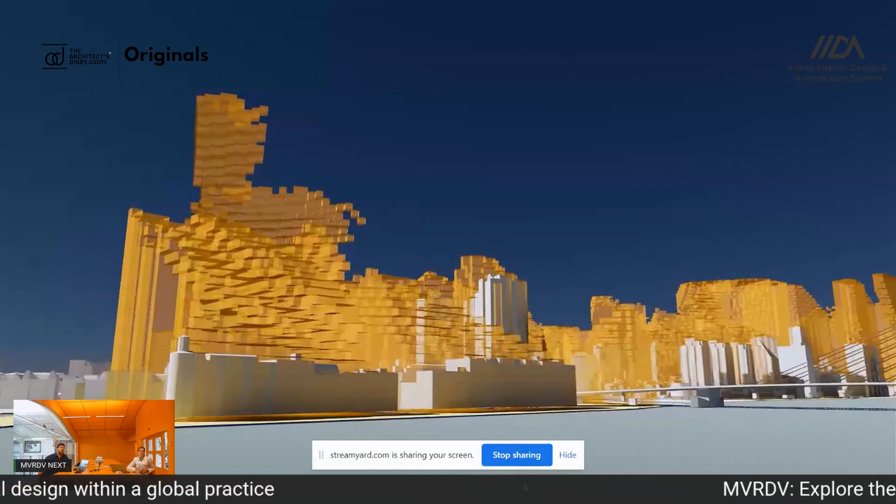And then what's also interesting is, as I spoke about earlier, through these technologies we can visualize the impact or the possibilities of this, and you can immediately communicate and show people what it would look like, what a building policy would mean or imply for a city.

And also what you see in this movie is what we talked about in the beginning, indeed technology as a tool for the imagination. This is also how we utilize technology within the office as architects and designers: we design tools to design our projects. This is something we firmly believe in, that architects and designers need to be able to handle and design the tools that make design. Exactly, how to, as a designer, remain a maker of a tool and not a user of the tool. I think that's our position, where the reinvention of design through technology is a central element of that.

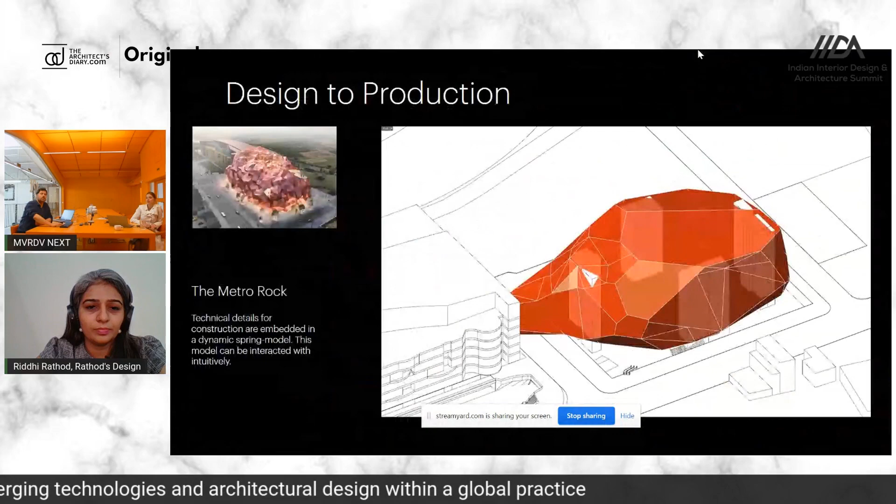And that was built in Grasshopper, so built on top of Rhino in Grasshopper, as a custom plugin that we developed for the project, Valley. Maybe, yeah, there are many housing projects, so I thought it might refer to this one. This was built in Rhino and Grasshopper.

So this question is from me: are there different softwares used in different projects?

Yeah, I think there are some main tools we are working with at the moment. From our side, that's Rhino and Grasshopper, of course, just because it's very customizable, so we can really tailor it to the needs of MVRDV, and Revit because it became an industry standard. At least speaking for myself, not a big fan of it, but we have to use it, and it has its advantages. On an urban scale, we work a lot in GIS for data management. QGIS we use there. And then on the more experimental side, we are also developing applications in Unity.

That's more on our side, where we're building things that are real-time, more about interaction. Then there's some open source stuff we work with, more on the experimental side, just machine learning frameworks, Google Colab, cloud computing, and these kinds of things. But I would say in day-to-day practice at MVRDV, it's probably Rhino, AutoCAD, and Revit, and then custom plugins, extensions and scripts on all three of those.

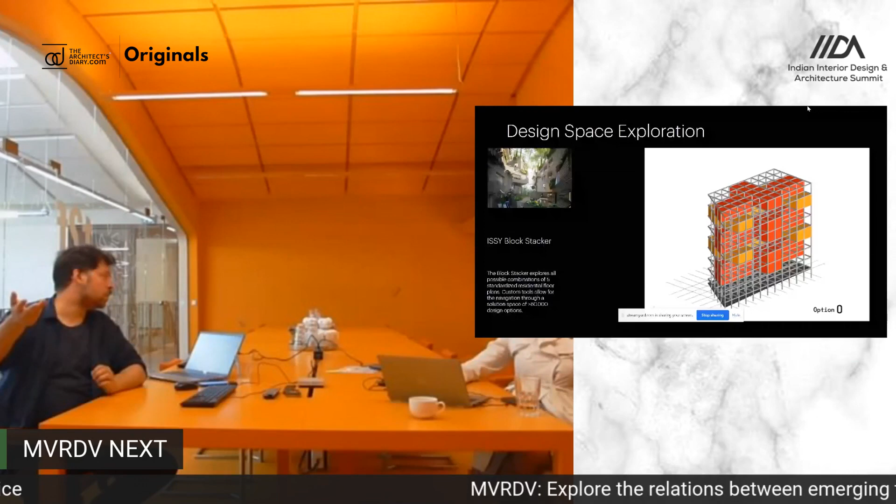approaches towards the interior. But the project in Paris that we showed earlier was initiated and designed through interiors. It's just that in the way we look at them in the tool, these are abstracted into boxes, because for the evaluation of the algorithm and the technology, the interiors were only relevant as windows, I guess, on daylight. And then they're already embedded in the design in the combination of the floor plans.

But probably if another architecture office had a group like MVRDV Next, where the methodology starts more from the interior, you would see very different tools created there. And that's also what we are really interested in—this diversity of design tools and design technologies that emphasize the character of architectural offices and practices, compared to a globalization of everyone using Revit and creating the same kind of buildings.